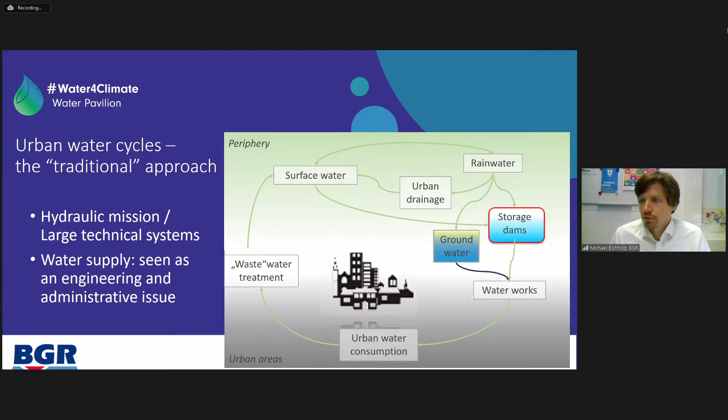This traditional system is coming to a crisis, so to say, as the climate conditions are changing. More heavy rainfall events and more droughts are provoking changes in the hydrological side of the system. We have major rainfall events that are exceeding the capacity of the drainage system, and we have major droughts that are exceeding the capacity of the water storage systems that have been built.

So storage dams are running dry because of lack of rainfall for many years. This brings many cities to a situation of crisis, which triggers also a rethinking of how this urban water cycle and the urban water systems can be converted and transformed towards resilient supply.

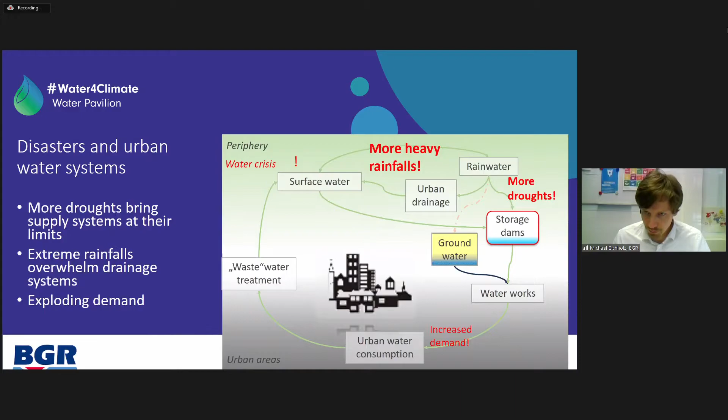Some transforming solutions are brought up in the literature, and some cities are taking this journey and innovating in many ways. But the core aspects and concepts are the increase of recharge.

This relates to the groundwater, so having decentralized recharge facilities that try to close the water cycle within the cities.

Another strategy is to increase the storage by augmenting the storage dams, and also using the aquifer as a storage solution. We will hear of that in our second example.

Also of importance is the consumption side, to reduce consumption and make efficient use of water within the cities. The core aspect is also to reuse the water that has been used by the public, by industries, and also by agriculture. So the term wastewater in many cities is being reviewed, and it is seen more and more as a resource than as a burden that has to be evacuated out of the city.

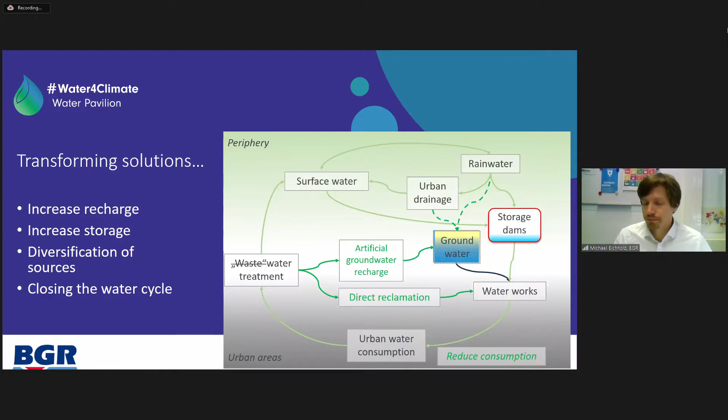So what is the transformation about? I think the point I want to raise here is that urban supply systems are more than technical infrastructure. A supply system connects the resource with the user from a very basic perspective, and it comprises not only technology, but also institutions that manage the technological infrastructure, as well as knowledge and everyday practices of users and of the people managing these systems.

And a transformation of a supply system, therefore, isn't only about introducing a new technology, but also reviewing the institutional setups, the knowledge exchange, and also the practices in place.

So, without further ado, we will come now to two practical examples where we can see how two cities are approaching this transformation in order to prevent floods and droughts. The first example is from Hamburg.

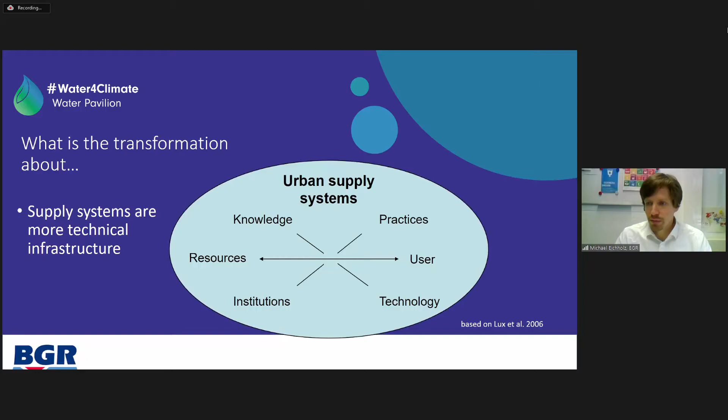It's a pleasure for me to welcome Dr. Sonja Schlipp from Hamburg Wasser, Hamburg's water utility. She's working for Hamburg Wasser in the Department for Integrated Stormwater Management, and since 2007 on several projects about climate change adaptation and urban planning, so has a lot of strategic and practical experience in the field. The floor is yours, Sonja.

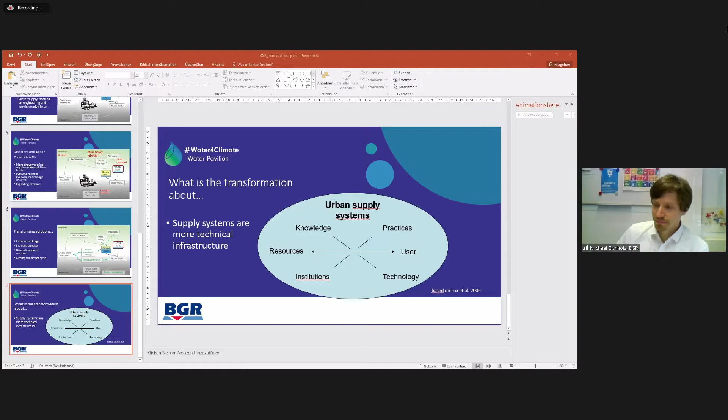Happy to hear your contribution. Yeah, thank you very much, Michael. I hope everybody can hear me, and I hope I'm able to share my screen like I want to do it. I think it works now, right? Yes, perfect, I see what I wanted to see. It's always an adventure to present like that, because every time it's different.

Thank you for the invitation, for taking part in the water pavilion here. I'm looking forward to my presentation and to the discussion we have afterwards, hopefully.

I'd like to talk about stormwater management in Hamburg and how we try to implement it, and how we try to include all the stakeholders which are needed to do this transformation. So I will talk about the challenges of water and sanitation systems in Hamburg with regards to climate change and urban growth, the planning of adaptation measures, the implementation of those measures, and the cross-sectoral integration at the city level, and give a short outlook.

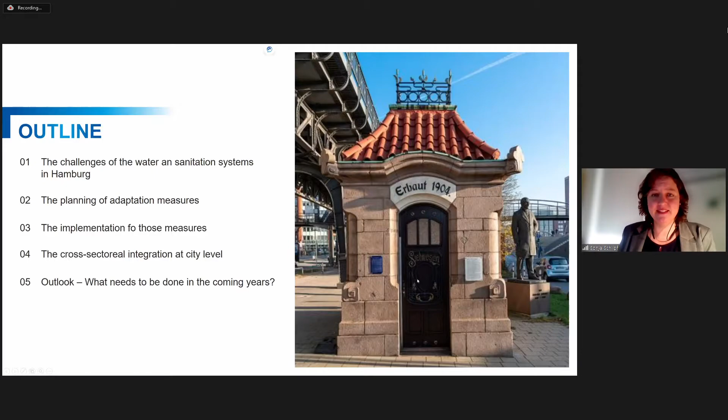But first of all, I want to show you this picture. This is the entrance for one of the oldest sewage systems in Germany and in north of Europe. We have had it since 1845, I think, and this is the entrance which was built for Emperor William the Second to visit this sewage system because it was that new.

Hamburg Wasser is a utility responsible for the water supply and also for wastewater management, and we have different consulting services as well. We still have Hamburg Energy, another company which provides renewable energies for Hamburg — just as an introduction to where I come from and where I'm working.

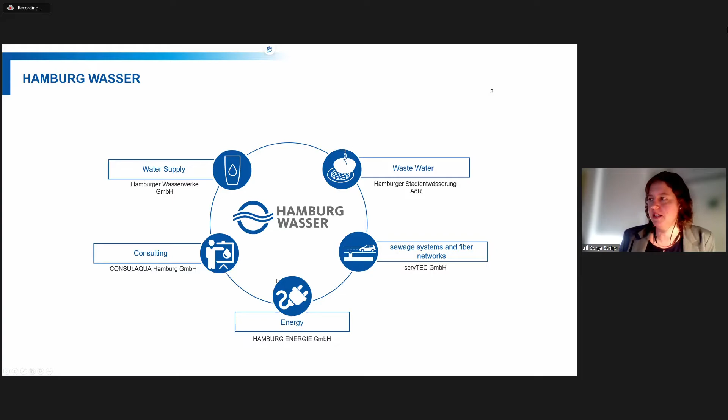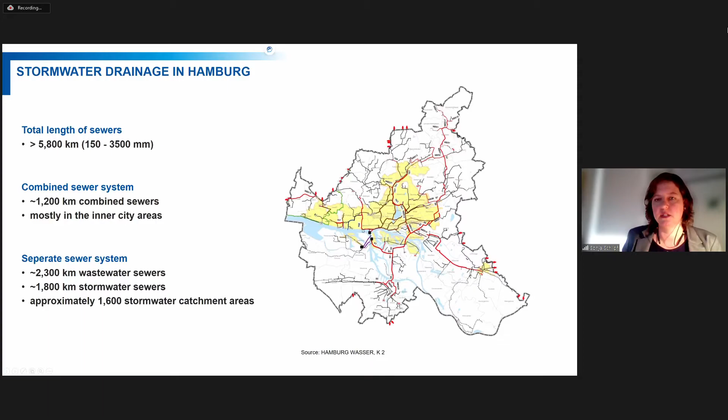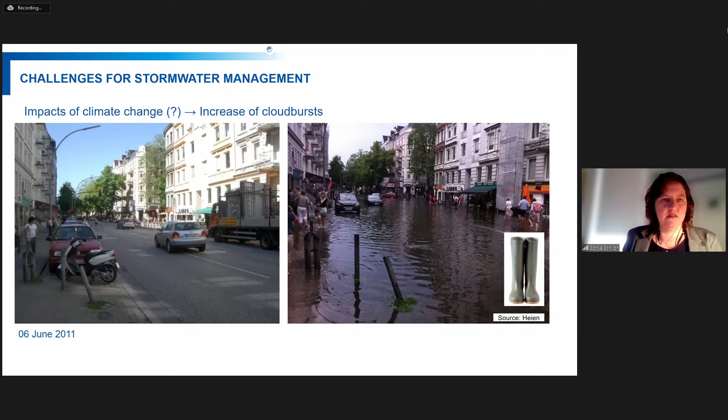The challenges for stormwater management are that they are coming so fast, and we are faced in Hamburg with this as well. You can see here one example of one stormwater event — the water is on the street and the runoff is not that fast.

That means Hamburg, as a growing city, has problems with soil sealing. So with the runoff, the water is faster; we have less possibilities for infiltration of the rainwater and so on. And since we have such a huge sewage system, with about 6,000 kilometers of sewer, we cannot maintain every corner of the sewage system once a year. So we have to think about new strategies.

On the other hand, there's climate change: higher temperatures, more heat waves and droughts, high tides on the Elbe which mean restrictions for drainage runoffs into the Elbe, and a higher probability of heavy rainfall. So this is what we are facing with our water and sanitation system.

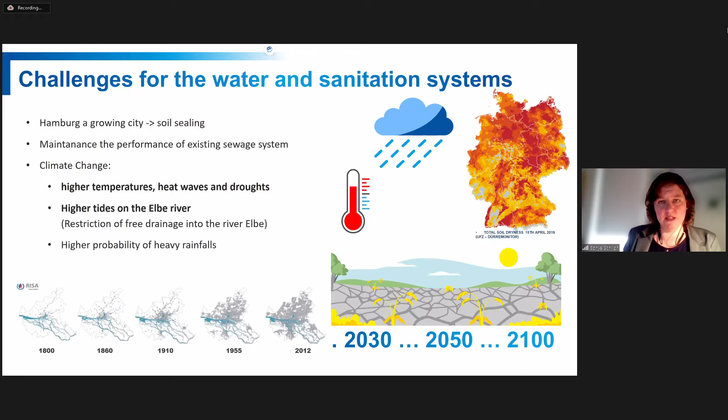That means Hamburg has been thinking since the 1990s about how to meet that topic and how to reduce the risks of stormwater management. The first thing that happened was a big investment to install huge intercepting sewers under the combined sewage system, to reduce the overflows of the combined sewer system into the rivers inside Hamburg. This was a great success.

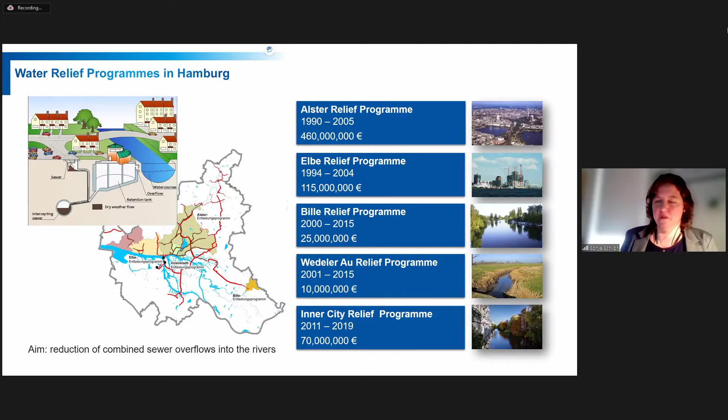So we have fewer discharges into the rivers now, and the quality of the water is increasing, but it's not enough. That's the reason why Hamburg started RISA — a project called Rain InfraStructure Adaptation.

And there we have these goals: to do flood mitigation, to prevent and protect the waters and rivers in Hamburg, and to adapt to the near-natural water balance. That means we are trying to reduce the runoff, to store the water where it's falling, and to use and reuse the water wherever we are able to.

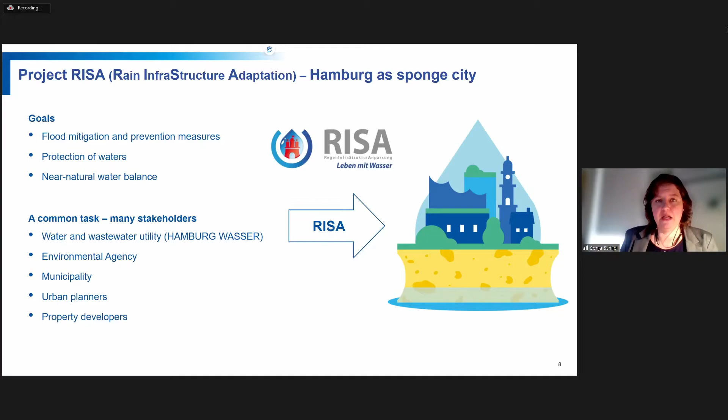Since this is a common task, we need a lot of stakeholders. There's the water and wastewater utility, the environmental and energy agency, the different districts and municipalities, urban planners and other actors involved in this project, because there are so many things we need to talk about.

So what does this mean for urban water management? We have started multifunctional plants for rainwater treatment, where we can do some water retention, and the water is cleaned by a plant-based sewage plant, especially for the street water which comes from the streets.

We are trying to disconnect surfaces, for example on school yards. We have to keep the robust drainage system as well, and we are trying to have redundant systems and implement circular resource-efficient systems for energy, water and material flows, like the Hamburg Water Cycle. You can see this example on the Hamburg Wasser website.

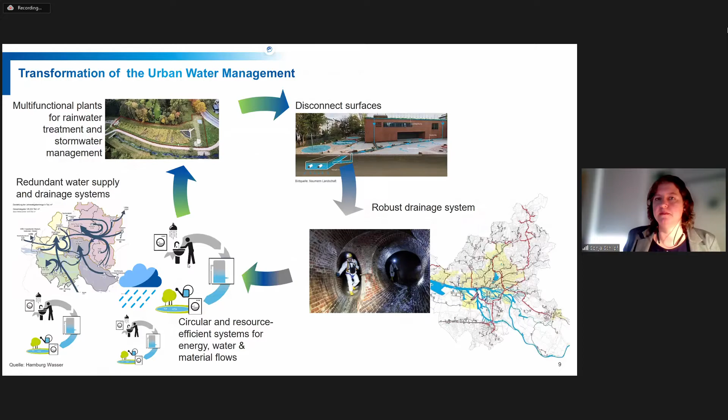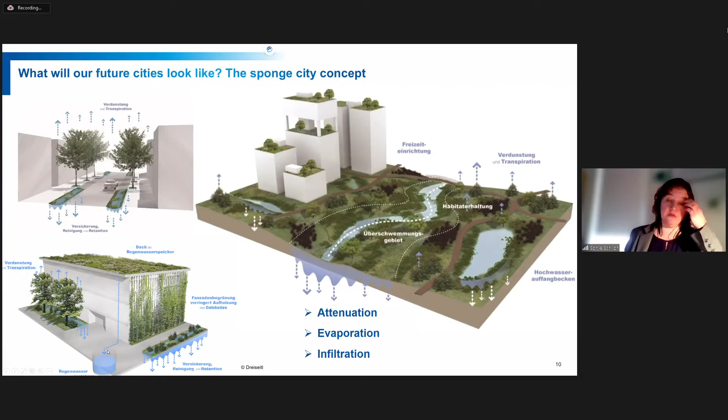What does this mean for the city? We are trying to implement the sponge city concept—increasing evaporation and infiltration, keeping the water everywhere possible. The best would be blue-green streets, where rainwater is kept in the streets and can be used for the trees, for example. We also have, or are trying to implement, green roofs to reuse the rainwater from rooftops.

We have a communication strategy with a website and brochures, informing about the different levels of stormwater events and what kind of effects they have. And we have many pilot projects which show how to implement stormwater management in Hamburg.

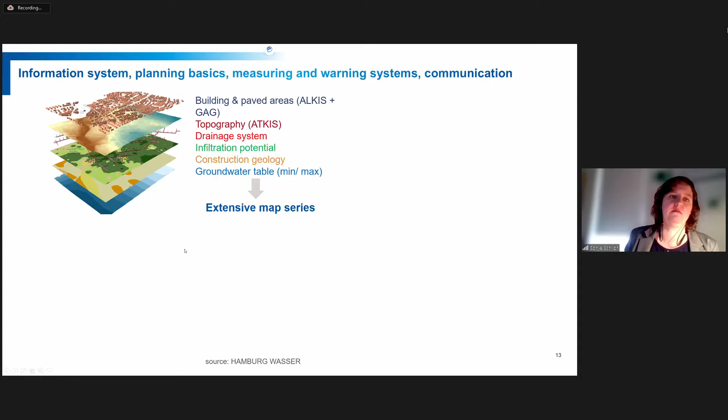One of the newest maps, provided by the Hamburg GeoPortal, is the stormwater map, which shows low-lying areas that can be filled by rainwater. It's only a topographic map without dynamic calculations—Hamburg is too big to do this once in a short time—but we are working on a dynamic map at the moment, and it will be implemented in the coming years.

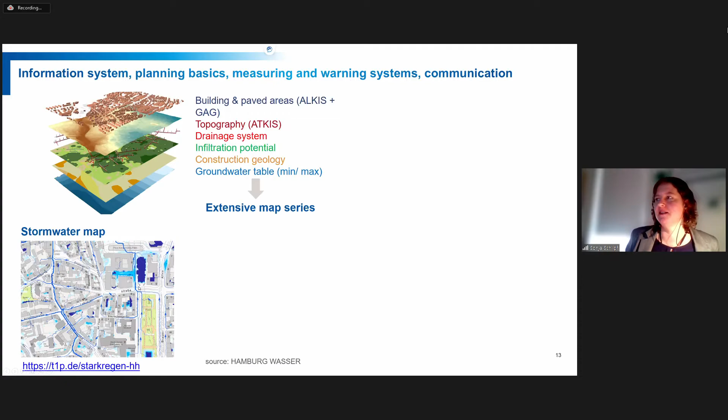The other topic is the stormwater index. Hamburg Wasser is collecting a lot of data on rain events all over the city. We have stations everywhere collecting data on rain, runoff, and soil moisture, and the data is collected in the stormwater index map, which can be shown on the internet. Here you have the internet address where you can look at it, to raise awareness so citizens can see how heavy the rain was.

Whether it's just usual rain or a stronger rain that the sewage system can deal with, or a catastrophic, extraordinary rain that requires action—usually prevention by citizens is necessary as well, so they have to look at their own plot and take some safety measures.

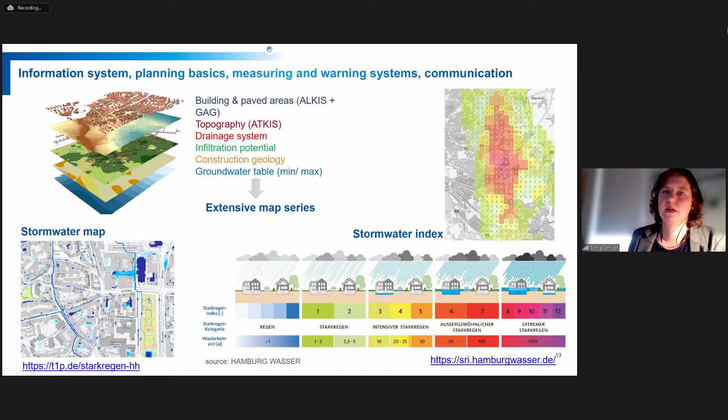I want to show you some examples of what we are doing to raise awareness, but also to show what kind of possibilities we have for retention in different areas. We work in some cases together with schools and the authority responsible for schoolyards, where we have installed some areas where water can be retained during heavy rainfalls. This is sometimes included in educational programs, so students can learn more about heavy rainfalls and how to prevent damage from these. It's a great, big, and successful program, I think.

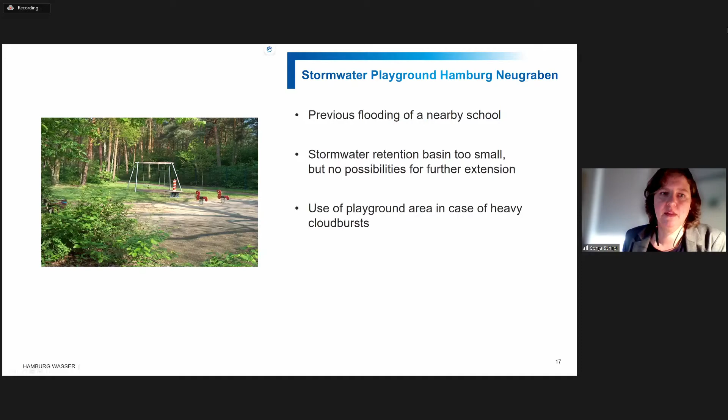Another topic was to implement flood prevention in a playground development. We have an area where a school nearby was flooded very often, and the stormwater retention basin was too small. So we were looking for areas and places to prevent these events and retain the water for heavy cloudbursts, for example. There was then the possibility to use this playground.

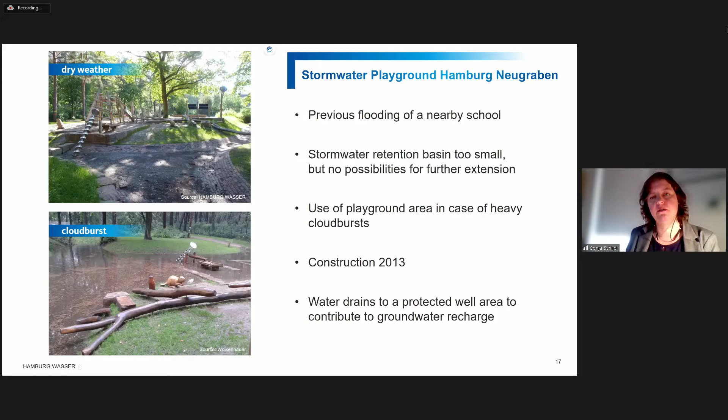This stormwater playground was constructed in 2013, and we have several water drains to water retention basins like this, which can be used for playing during dry times. But if there is a stormwater event, the basin can be filled with water, and afterward the water is drained to a protected well area and can contribute as well to groundwater recharge.

Another very successful example is a sporting facility at the Hein-Klink-Stadion. It was a previous hotspot for flooding. There was a necessity to increase the drainage capacity in this area, but it was prohibited that the water would run into this river. The river needed to be protected because too much water would have run down into it.

So Hamburg Wasser looked for an area where the water could be retained very easily, and they found this sports facility. It was a very lucky situation because the sports facility was lower than the street, and it was planned to be reconstructed. So we used this chance to redirect the surplus stormwater into this area.

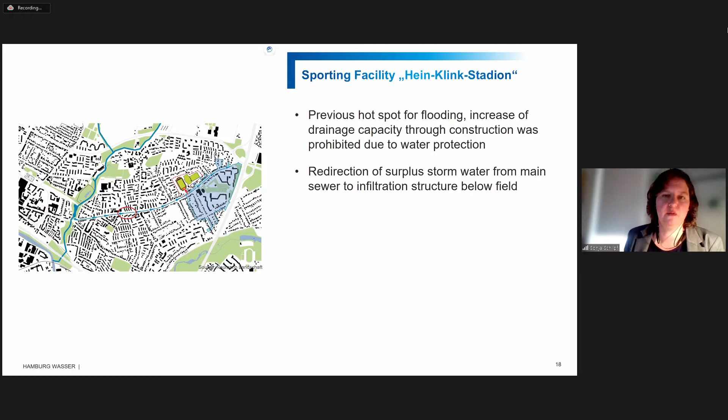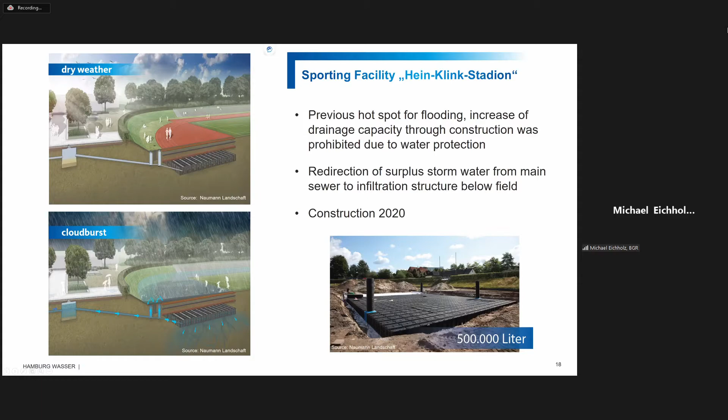So here you can see how it works, showing the water flow. This is just another example.

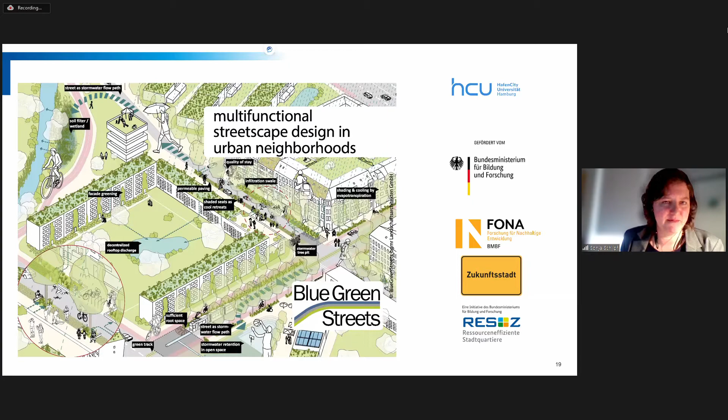I just skipped this. We have also some research projects dealing with this topic.

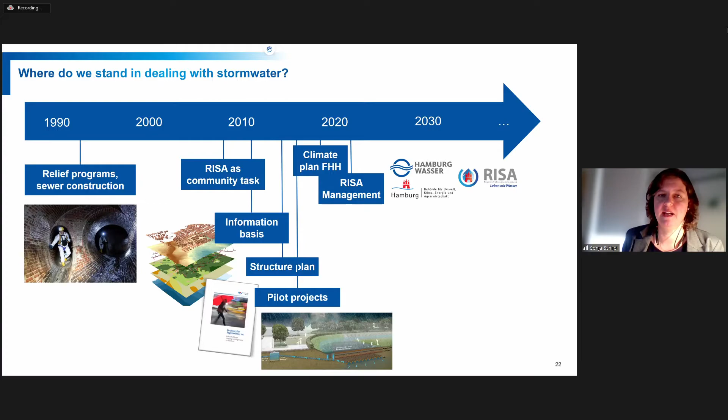So where are we now? We have these relief programs, we have RISA as a community task, we have some information bases, the structure plan, and some pilot projects. Now we start with a new phase because we have new political will with the climate plan of the Hamburg Senate, so we can implement more measures on RISA and rainwater infrastructure adaptation in Hamburg. We are very happy that we have the ability to do more in the coming years to integrate stormwater management in city and landscape planning, and have more blue and green possibilities in the city.

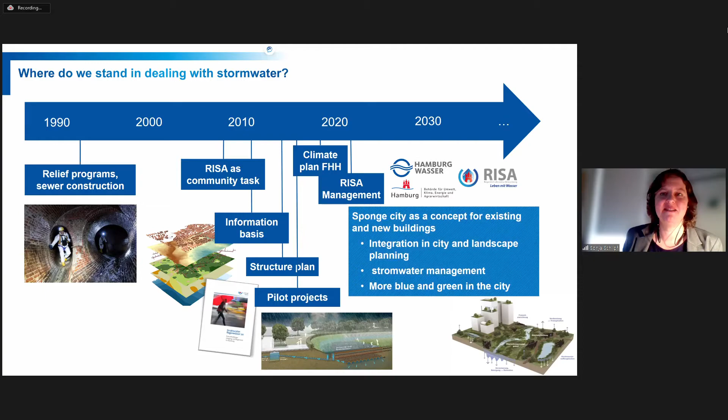I skipped the summary now and I'm looking forward to the questions. Thank you very much.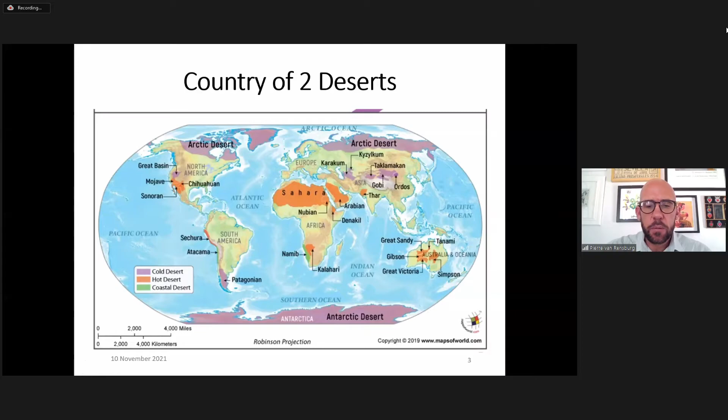Looking at the global desert scenario, and more specifically at Africa, you'll find the Sahara Desert in the northern parts of the continent. But if you look further southwest, you'll find the Namib Desert along the southwestern seaboard, as well as the Kalahari Desert just adjacent inland. That happens to be exactly where you'll find Namibia.

Just quickly looking at the climate of Namibia, you'll see the impact of the desert landscape. On the top left, rainfall: everything along the western seaboard and south of the country receives around 200 to 250mm or less. The same with evaporation, slightly reduced due to the mist belt along the coast, but everything to the south, especially the southeast, sees heavy evaporation in the order of 2,500mm per annum or more.

In terms of rainfall variability, much the same picture. Everything that's not yellow, lower than this beige, has a rainfall variability of 40 to 50% or more, reaching 100% or more along the Namib Desert coast.

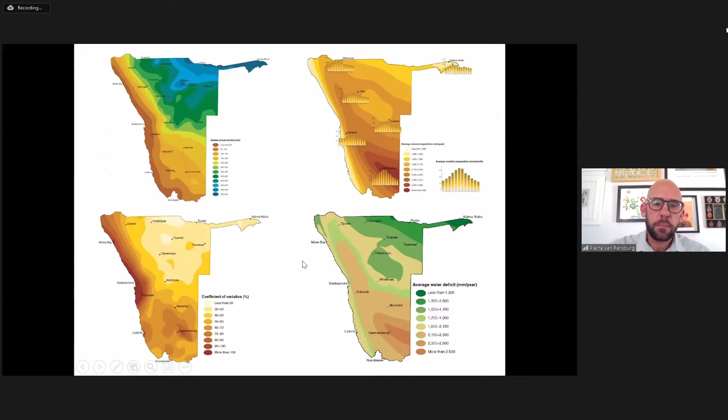Not surprisingly, you'll find a water deficit basically everywhere in the country, but more extreme around Windhoek in the central areas, as well as the Namib coastal areas and the far south.

Just a brief introduction to Windhoek as the capital city. It has about 450,000 population, located on the central inland plateau at 1,650 meters on average above sea level, so quite high. The city is surrounded by mountains.

Getting back to water supply, Windhoek sits slap bang in the middle of the country. In terms of surface water availability, there are rivers shared with Angola, the Kunene and the Okavango, the Zambezi shared with Zambia, and some lower rivers shared between Botswana and Zimbabwe. But for Windhoek, the nearest surface water to the north is about 700 kilometers away.

To the south is the Orange River shared with South Africa, more than 800 kilometers away, so really nothing the city can draw on from a water supply perspective. This is against an annual rainfall of around 350 to 360mm, with evaporation several times the rainfall, leading to a big water deficit.

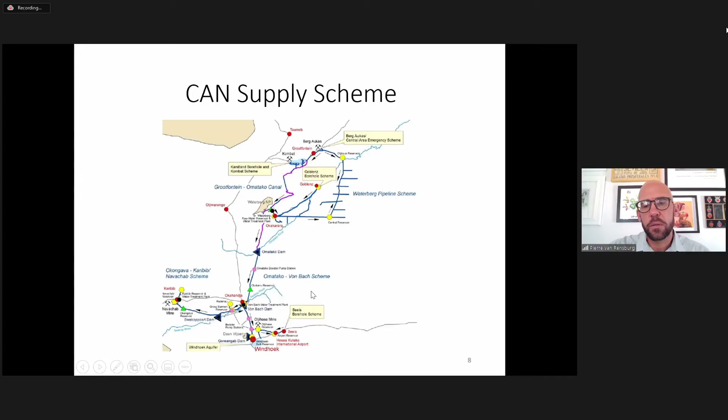From climate change in the country, as pretty much everywhere else, there's an expected increase in temperatures, both summer and winter. But I think what is more important from a water supply point of view is the fact that we expect a total rainfall decrease of between 15 to 20%. And on the other hand, we expect an evaporation increase of 10 to 15%, which obviously will greatly impact the fact that we obtain our water from surface water dams.

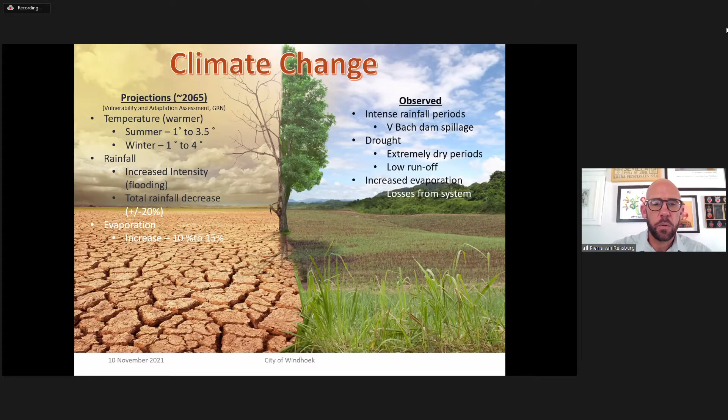Putting it in context in the African continent, this just resonates what I've just said. The increase in temperature expected, if you look at the scale, is around 3 degrees. And then overall, there would be a decrease in rainfall or precipitation, in the order of 10 to 15%. Interesting to note is the big reduction in winter rainfall expected, which obviously would affect Cape Town, which is predominantly a winter rainfall area.

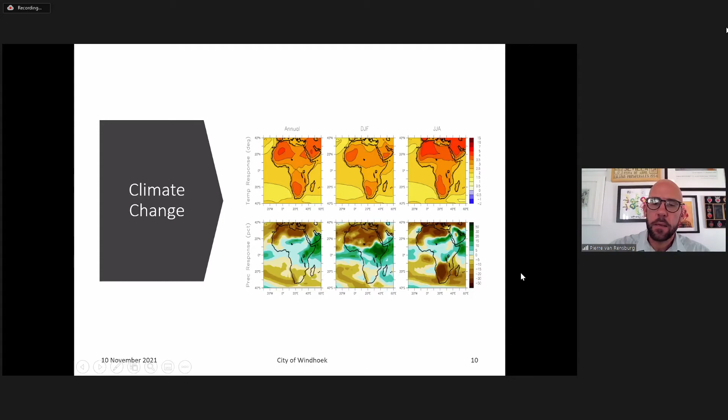And that area is cut off. So the normal drainage of the water is to the north, underneath the city. But there is a schist, a micaceous schist layer, which basically seals off this aquifer, creating a basin between the natural recharge area and the cutoff line on the city. That basically is an underground storage area that is utilized for water supply to the city.

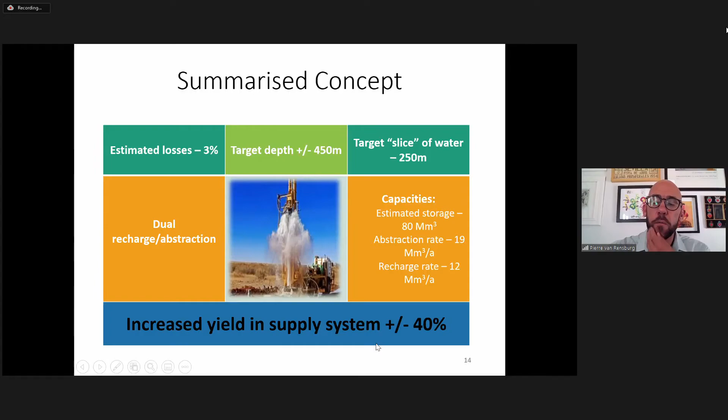And that can supply the city between 3 to 4 years in an emergency situation. The impact of combining the aquifer storage with the surface water is actually an increased yield in the supply system of around 40%. Just to show you the main, what we call water banking areas - the city is indicated in red there.

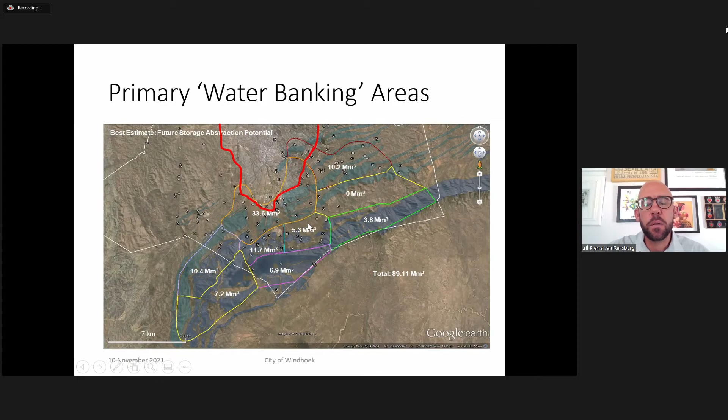You can see the development. The Auas Mountains to the southeast, and the aquifer lying in between, has got various compartments which are targeted for both recharge and abstraction. Something we realized which greatly impacts the scheme is the fact that because this aquifer area is so porous and highly infiltratable, we actually realized that it's also highly vulnerable to surface pollution.

And this probably led to one of the most, or biggest impact, political decisions, because it was decided a few years back to actually block out this entire southern area as a no development zone.

In the moment, development is all planning to the north. The impact is that around the city you find mountains, and this was really the only remaining flat area for development to take place. So it was quite an important decision to actually block this off from a water supply perspective and not allow development here.

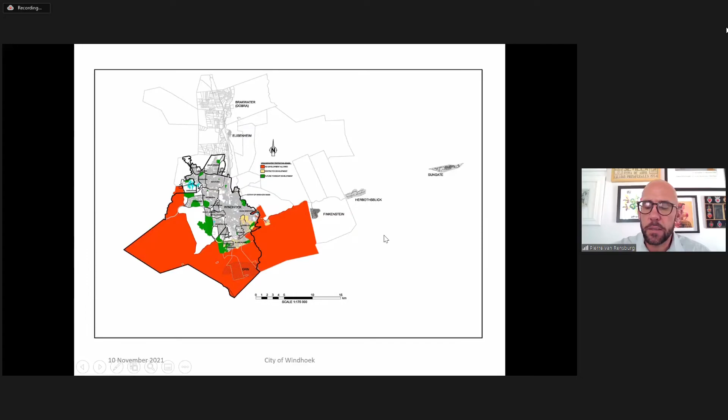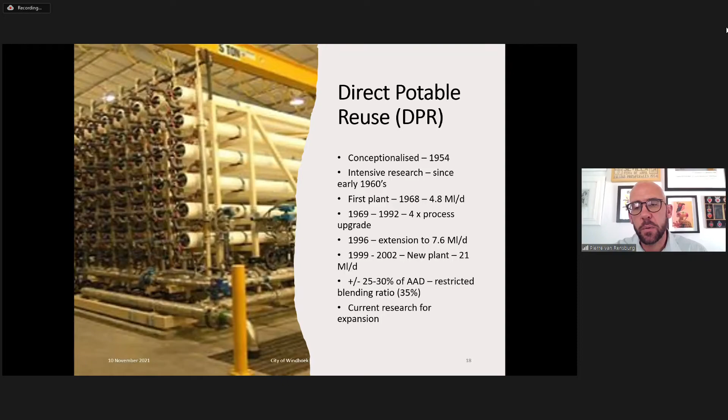Moving on to the reuse part, already conceptualized in the early 1950s, gained a lot of momentum in the 1960s because of a water shortage at the time, and finally implemented in 1968, which is very early if you look at the global context. Through the years there have been a number of process upgrades as well as capacity extensions, and currently we are looking into feasibility studies to expand the system with a second DPR plant, planned in the next 5 years or so.

A big fundamental of the reuse in Windhoek is that because we do direct potable reuse, we only use domestic wastewater. The system is designed so that the majority of the basin, shown in green, actually drains to a single point in the northwest. That is the point where we do the wastewater treatment and also the reclamation.

During the 70s and 80s, there was another big political decision, and all industries which generate wet industrial effluent were moved to the northern part of the city, which now has a separate drainage area with treatment in the far northern corner. The areas marked in yellow and pink/purple are what we are targeting for the next phase of DPR, together with intensification in the already existing basin.

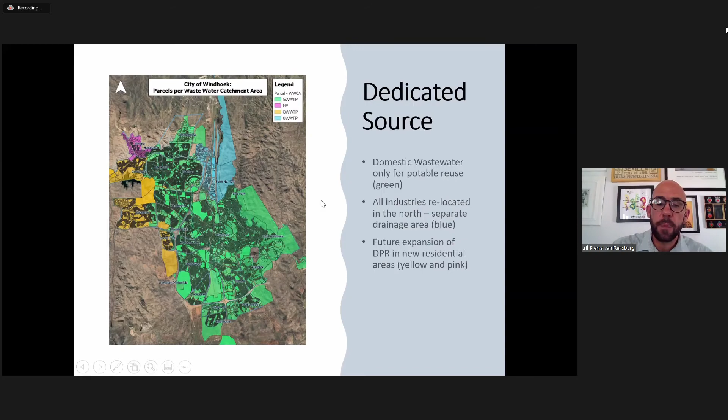I'm not going to say much about the process train, but it's interesting to note that although this is direct potable reclamation, there is no RO in this process train. The principles include using only domestic wastewater, and I think the other important one is that the design is a multiple barrier design, which has become a standard everywhere in the world. We also blend the final effluent to mimic the effect of discharge into a natural buffer, blending it with water from a natural resource, the surface water, in about a 1/3 to 2/3 ratio.

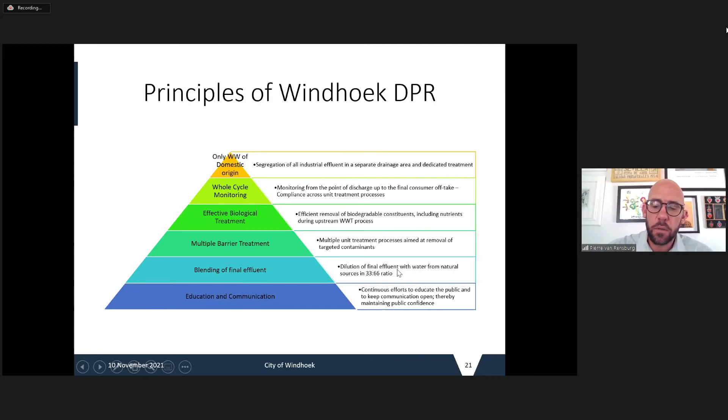So getting to the actual point, the 2015-17 drought. What you can see in red is droughts occurring, one in the early 80s, one in the mid-90s, and the most recent one. The blue bar shows above average rainfall, the brown or orange below average, and the black line gives total runoff actually received in the dams. What we noted was that with previous droughts, you had large periods of below average rainfall, which eventually led to a situation where the surface water failed.

But in the last drought, we saw a short lead time. Because we'd had a lot of rain, the dams were full and we thought we were comfortable, but very quickly the dams failed. Even though the actual rainfall was maybe not that low, the runoff was much reduced, so we had very little inflow despite the rain. We've noticed in recent years that the rain tends to come later in the season, and by then the vegetation growth on the surface is so much that the runoff is much reduced, so we don't see much inflow into the dams.

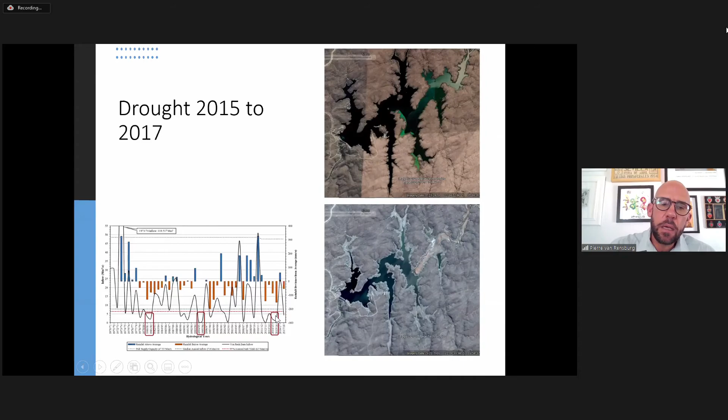On the recharge side, we were very lucky. This is a period of high abstraction—the blue shows abstraction from the aquifer, which was before the DPR and the dams were built, so that went down. The green shows actual recharge or artificial injection into the aquifer, which started in the early 2000s, and the black line is the actual aquifer level. It started picking up with artificial recharge, and we were greatly helped by a massive rainy season that brought about 3 to 4 times the annual rainfall, which really allowed us to start the drought period with a more or less full aquifer.

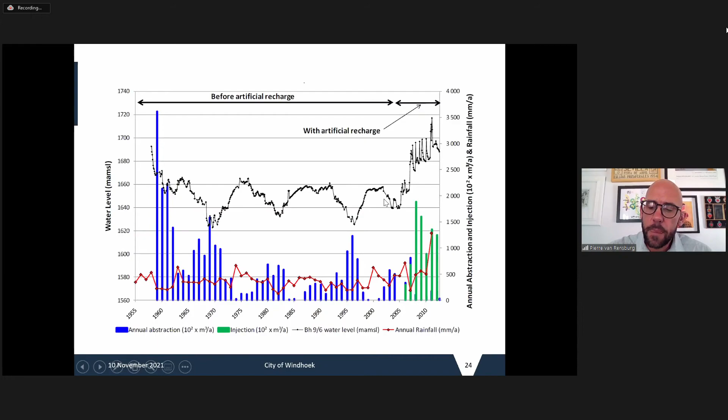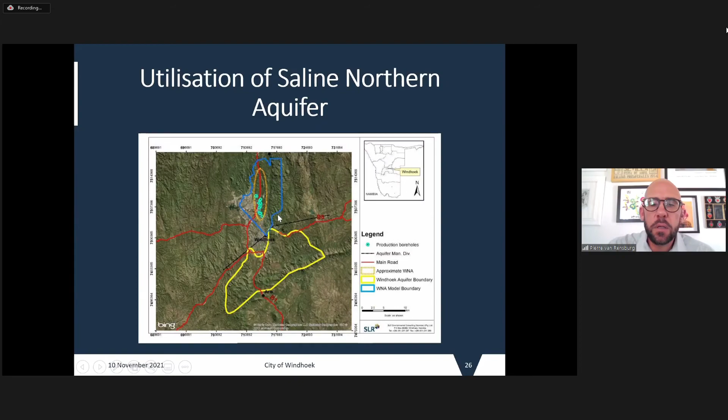We also allowed access by the industrial areas to the saline northern aquifer, which was previously unused, and we keep it in existence so that if there's a future water shortage, they can disconnect from the public system, allowing us that saving, and connect to the saline aquifer, which should then be in a position to supply them.

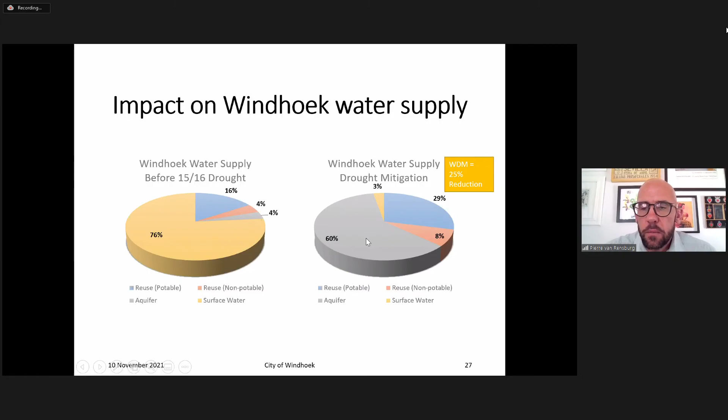So clearly you can see that going forward, with the expected climate change impacts we are expecting, we really need to be in a position to have alternative supply for the city in case the surface water fails. Thank you very much, Michael. That's the end of it.

Thank you very much, Pierre, for these very interesting insights, and for highlighting what role city planning plays in setting up such recharge schemes, and how groundwater is being used as a water bank for times of drought. I picked up this term from one of your previous presentations, and I very much like the idea of groundwater as a safety net for times of drought. I would like to ask if there are urgent questions from the Water Pavilion in Glasgow that could be raised now, as I know we are a little short on time. Otherwise, please give me a sign, colleagues from Glasgow.